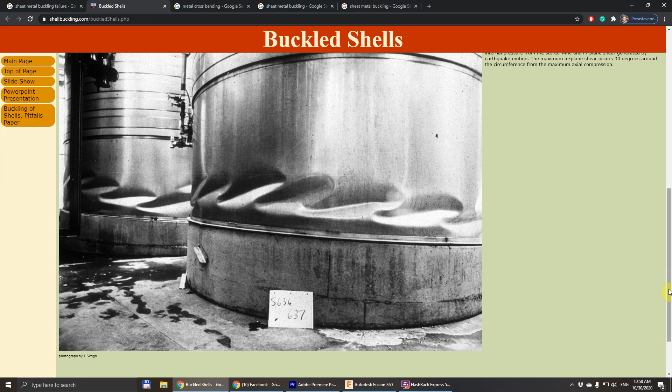Sheet metal buckling is quite a common problem, and to avoid this, manufacturers form various stiffening ribs and profiles into the surface of the metal. From all the shapes that I found on the internet, this one is the best. It would allow us to align the stem support during the spot welding to the anode plate without making any special jigs for it.

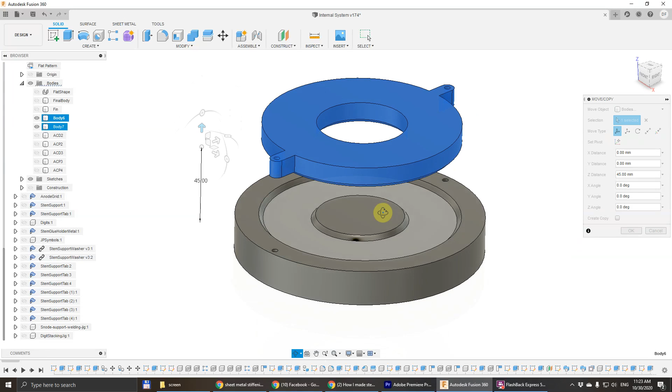To get some basic idea of how the press forming of this shape can work, I designed this press forming die to be printed on a 3D printer. It's just two parts and the metal will go between them, and I will press it on a hand press that I have available in my shop.

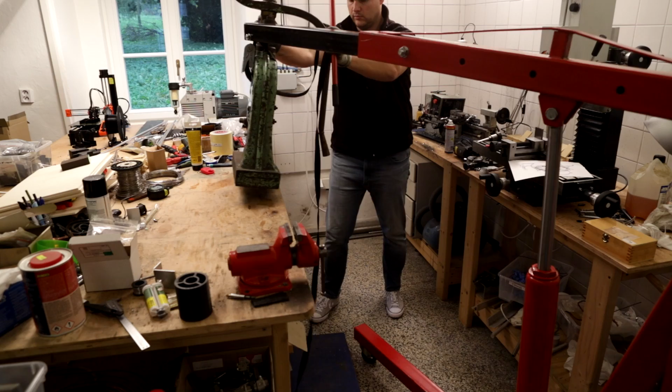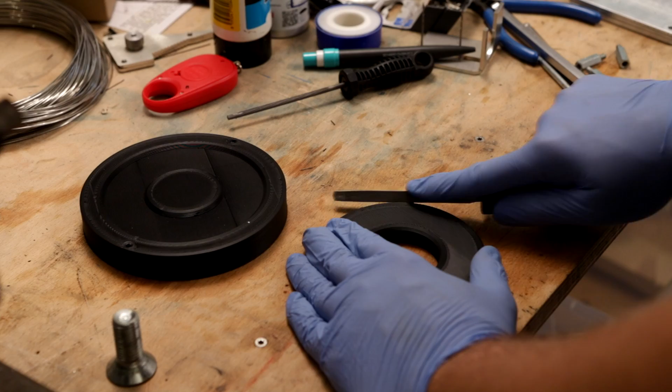As you can see here, it will be a lot of work to get this 0S system into 5S, but anyway, for printing the parts they need to be extra strong, so I'm using Prusament PLA with 10 perimeters instead of 5, which is the normal setting, and 50 to 70% infill. This turns out quite well, it holds the pressures.

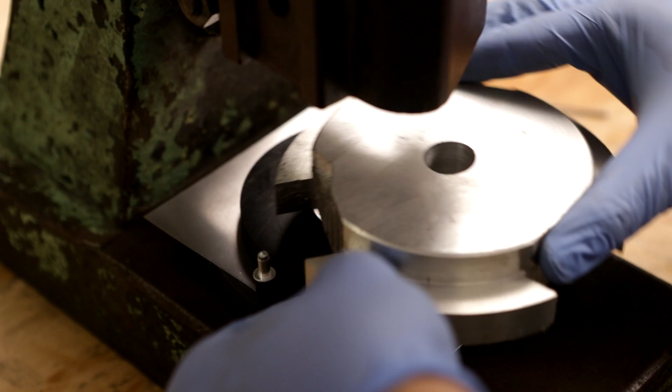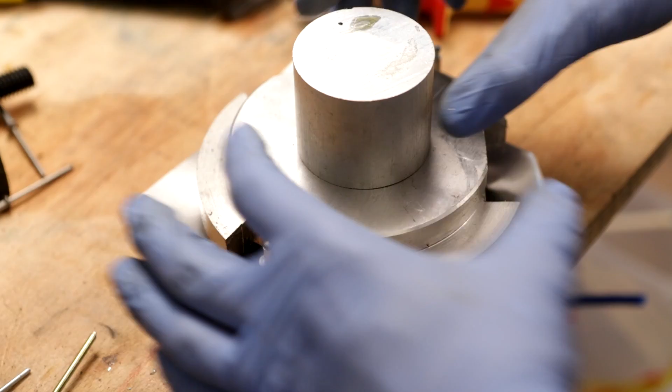The steel I'm using for the anode cap is called DC01. It's a deep drawing steel which is designed for drawing operations and very good for this type of forming. It has quite low tensile strength of 300 megapascals, and it should be the best we can use for this type of forming.

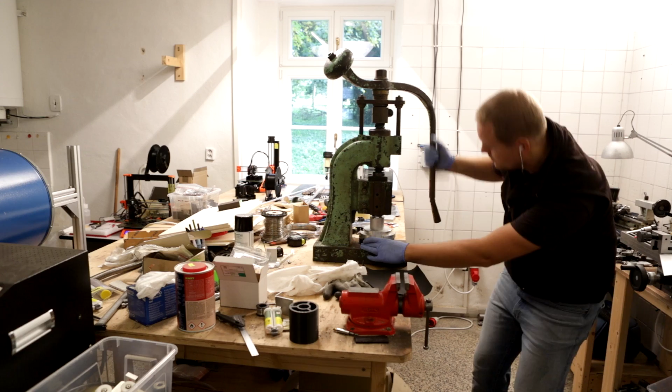And this is the first result. The center part is perfect, but around it there are quite a lot of wrinkles, so we will need to find a way to get rid of them. But what is important, already this shape prevents the metal from buckling quite a lot. And this is how it would look on the already preformed part for the anode cap.

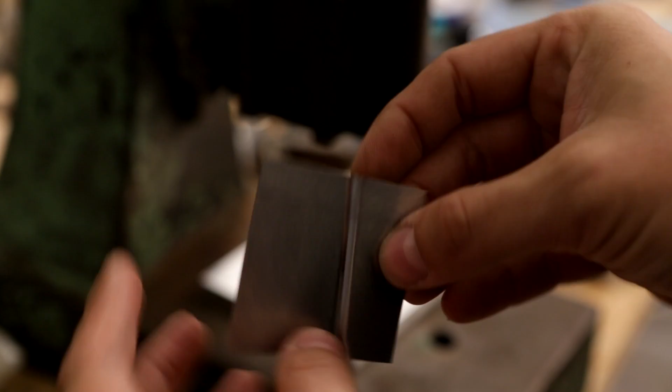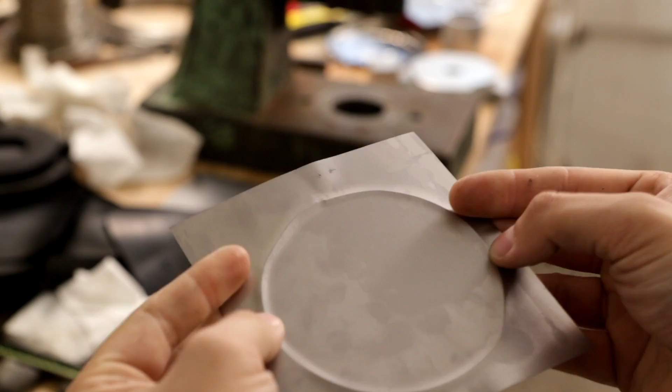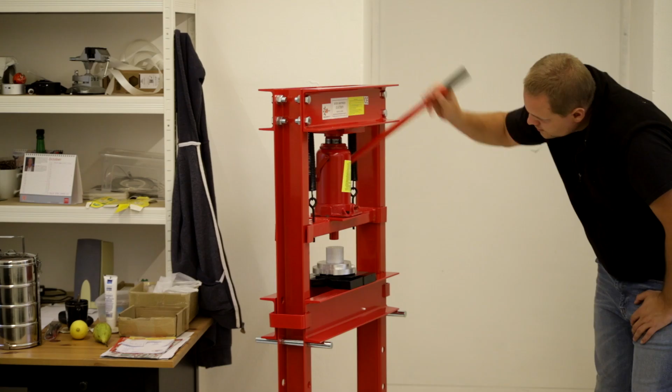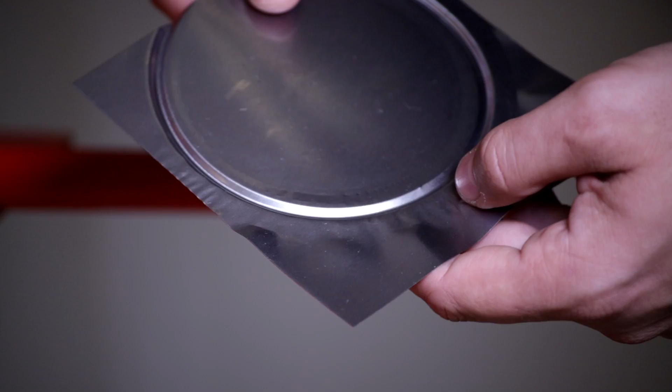I did some more tests with different shapes of the dies and different ways to form the sheet metal, and I quickly realized that I will need a more powerful press because this handheld one is not enough. So I bought a 20-ton hydraulic press. The press is really slow, but for prototyping it's good. Important is that it was cheap, it was like 150 euros, so for our purpose of testing it's enough.

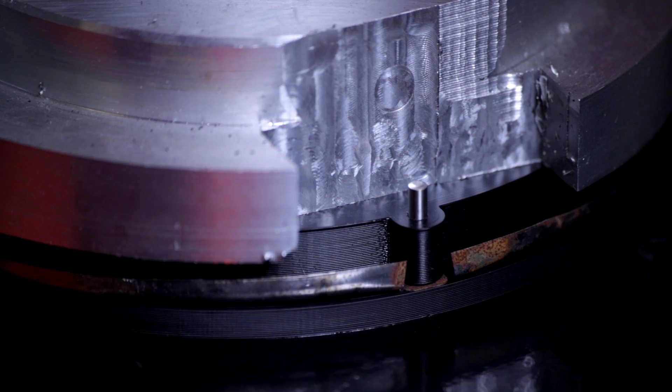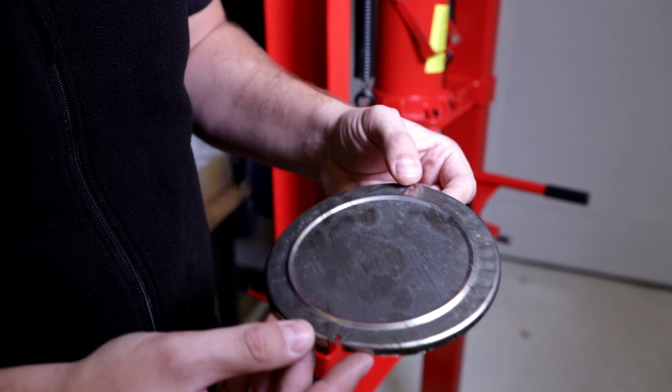With the hydraulic press I could test another forming method. It's called rubber pad forming, and it's about pressing the rubber pad against the die, and the pressure makes the rubber flow into cavities and around the edges.

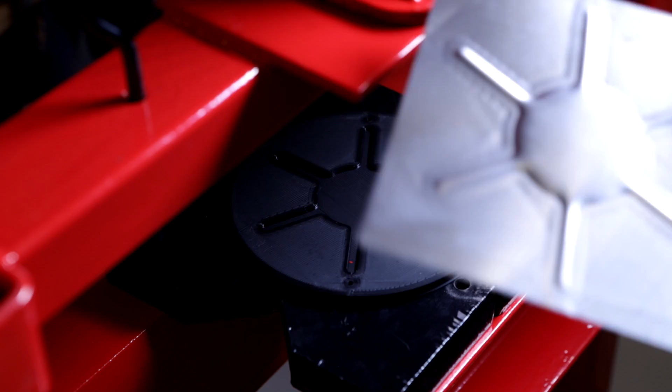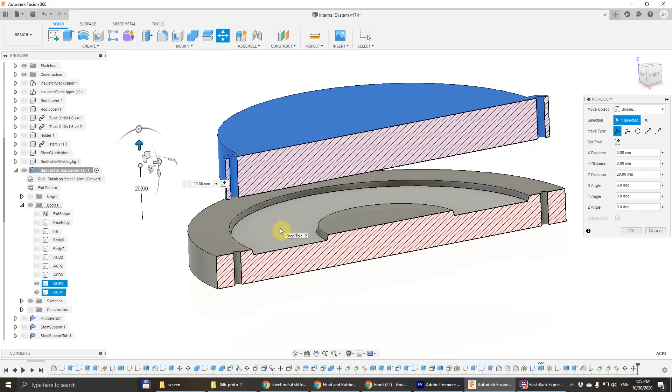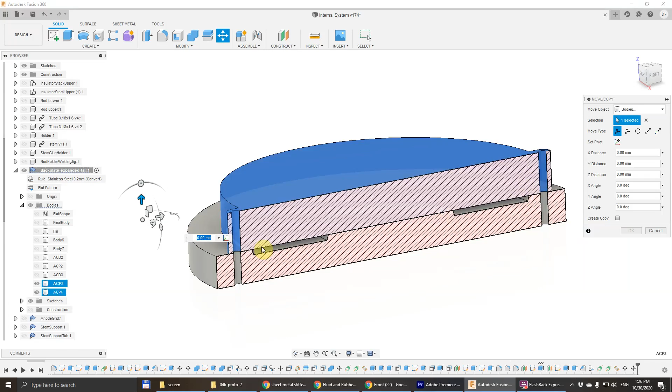In the end, I decided to return to the very first shape of the jar lid with the concentric circles, and instead of using two solid parts for the die, I will use the solid bottom. Then I will put a rubber sheet in between, and with a flat upper part I will press the rubber and it will flow into these grooves here, and it should take the metal with it and form the concentric rings into it.

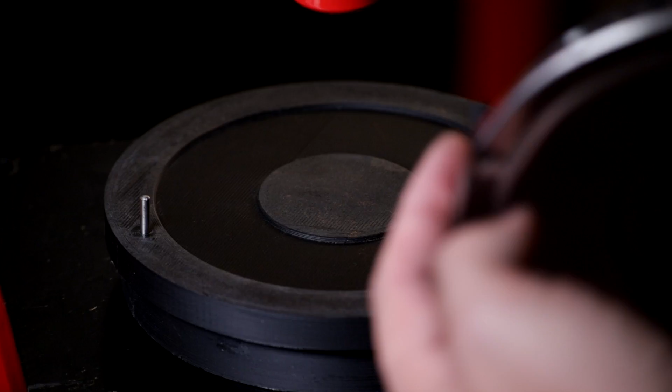The result produced with the rubber pad was nice and smooth, but still the anode plate tends to bend like this, and I found that the problem is here in these cutouts. It still tends to buckle in this direction. At the moment I will use what I have, but in the next iteration I'm going to redesign these cutouts so that we have a full solid edge bend here, which will help to improve the stiffness of the overall part.

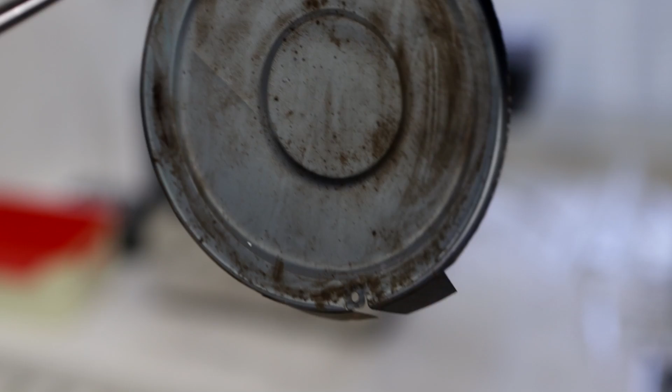To save time, I'm using the oven here instead of chemical blackening. The result is not very nice, but this is far from the final result that we will use in the production tubes.

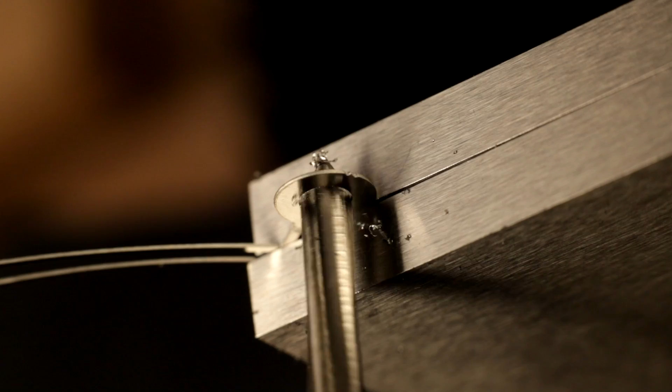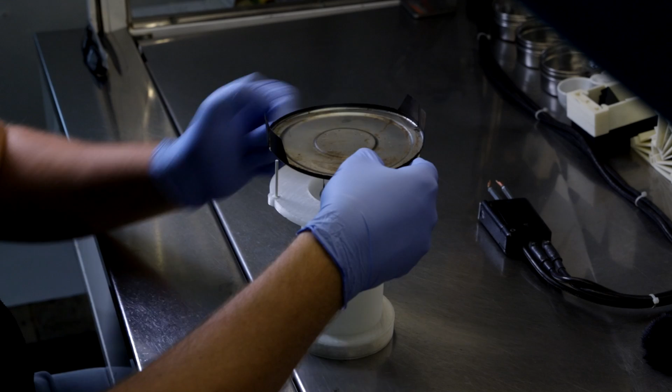In the comment section under the last video I got really great tips, and one of them was using a reamer tool to increase the diameter of the holes in the digits. I made a mistake and designed them too small, so I need to increase them before I order a new batch. And this is one of the reasons why I love YouTube so much. You get immediate response from 10 times smarter people than you are, and from people who have far more experience than you, and this really can get you farther in your project.

I'm using just a couple of digits here, not a full digit stack, but for the overall test of function of the tube it will be enough.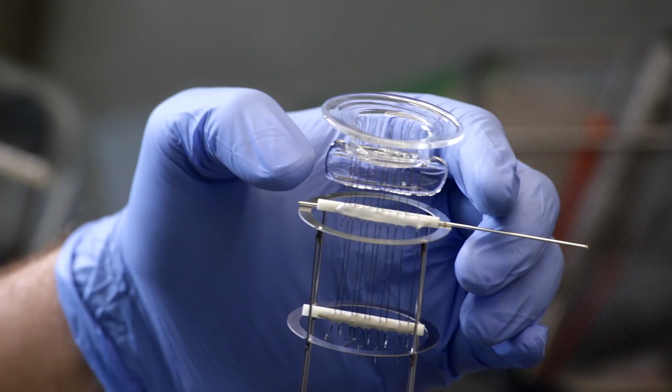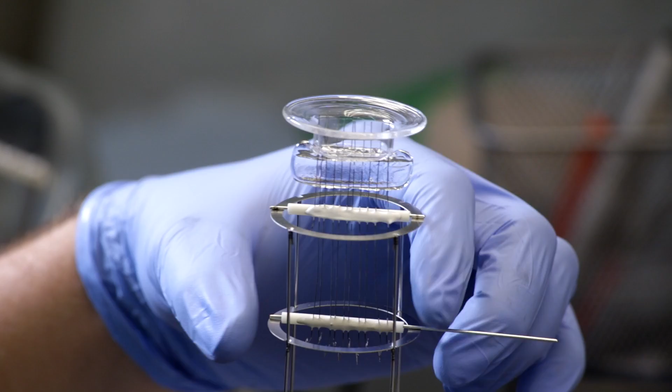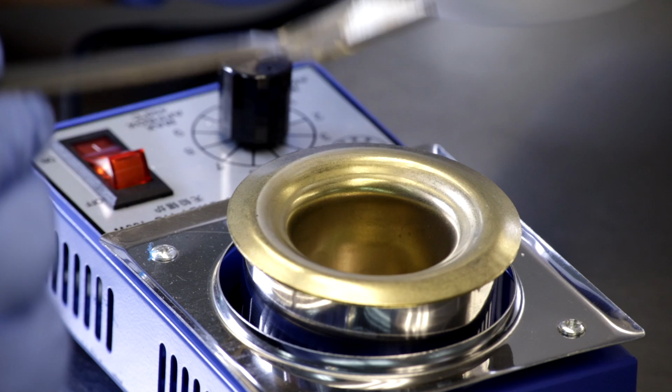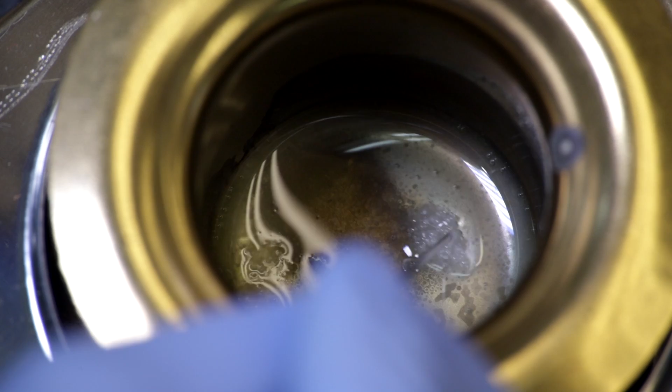Another improvement I'm testing here is the new way of stripping the ends of the thermal wire. The manufacturer recommends to use molten sodium hydroxide to strip the ends, submerge them into the water, and then you can clean them and spot weld easily. So let's see.

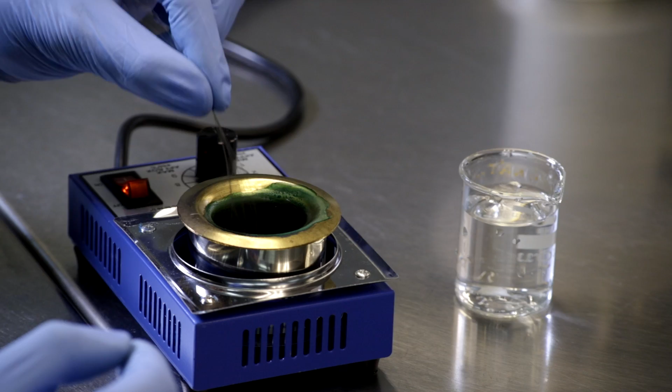The thermal wire is a nickel wire coated with a layer of ceramics. The reason why we are using it is that we want to use this layer of ceramics as an insulator against glow, because the wire will be directly connected to the digits. They will be glowing, and we want to prevent the wire from glowing, so it needs to have some layer of insulation.

I think this is a very good result, considering that this is the very first test of stripping the thermal wire this way. It will definitely need to improve the cleaning after the stripping, but as you can see, it's working very well.

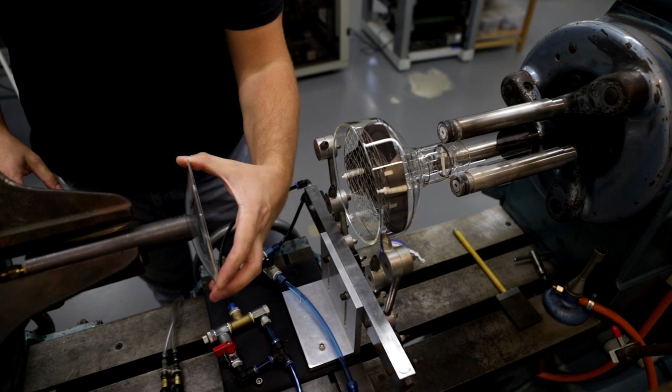And now it's time for the most stressful part, the glass work. For this beaker here we will need a higher flow of nitrogen. Last time the 0.7 liters per minute was not enough, so I'm mounting here a new rotameter for 10 liters per minute, so we will see.

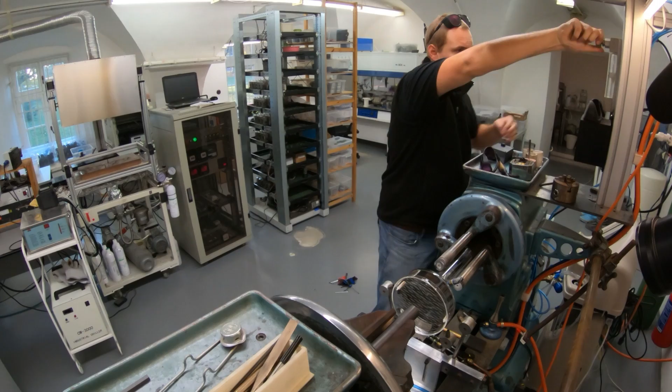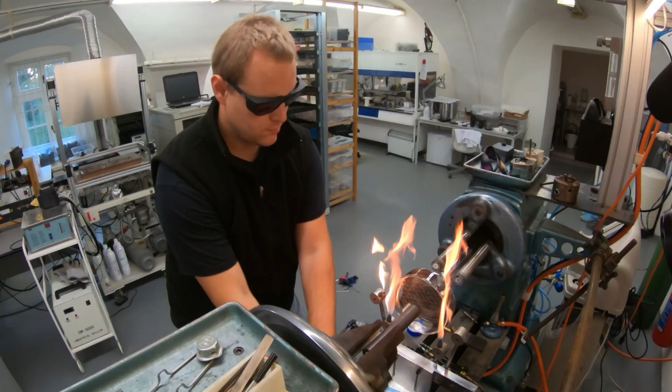This time I want to heat all the edge at once to softening temperature and then seal it with the graphite paddle. Last time I was heating it step by step and it wasn't good. It developed a lot of stress and also the seal was not uniform. So this time I hope the seal will be uniform and I will avoid development of the stress and the glass will not crack.

To be able to heat the overall seal I will need much more heat, so I had to mount another pair of jets to the carriage burner. You can see we have now 4 of them, so this should help us. I still have the handheld torch and this will be a backup solution.

This time the seal went out really well. It's a beautiful uniform seal all around the edge. It looks like it's from a professional factory. And I took extra care to cool it slowly, including the front window, because the window last time cracked because of the stress development.

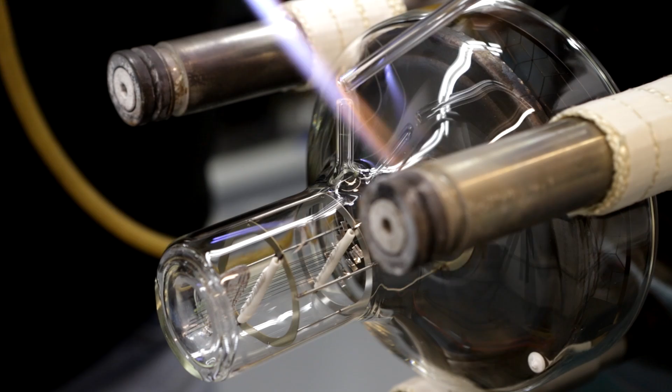And now finally the absolutely easiest part, welding the long exhaust pipe. This is so simple that I don't even need to change my big torch for a small one, which I normally use. I'm confident enough I can do it.

My impatience, the big torch and bad access to the pipe caused me to completely screw it up. The glass welded all together, closing the exhaust channel in the pipe, and so I had to fix it. I was trying to scrape the glass and crack off the tube. This is the way I normally do it, and then weld a new pipe. And then, rushing, I made another wrong decision.

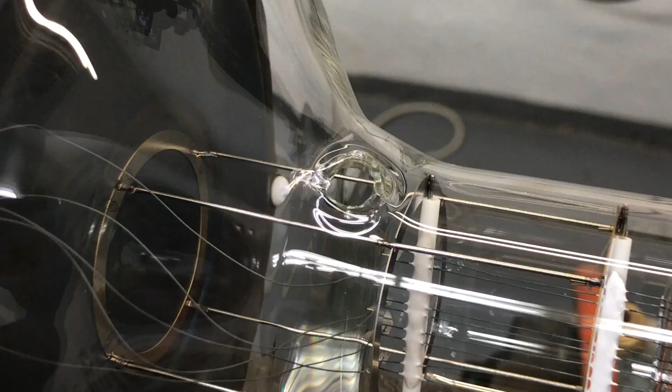When I need to open a finished Nixie tube for testing, for measurements, I always do it like this. I always scrape the top and then I hit the nipple with the tungsten rod and it always cracks off and I can use it. But in this case it didn't work. It took away all the tubing, which is not such a surprise, but I was so focused on the work that I didn't think correctly. Fortunately, I was able to fix it and bring it to the vacuum station.

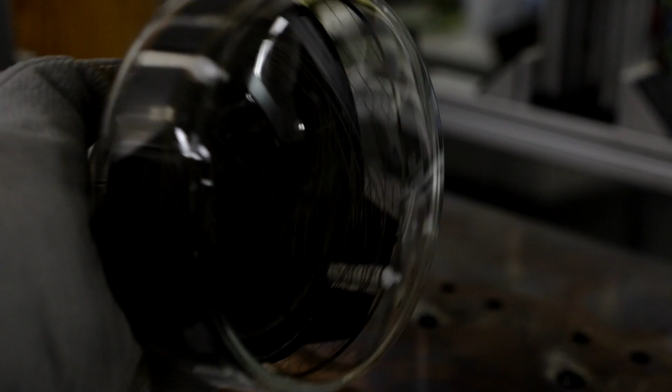So the first H-tube is finished and filled with gas. So let's connect it to the power supply. So the camera is running and the first glow of the H-tube. By the way, this is CD47, not that big. Oh, there is a short somewhere. Oops.

Okay. So the anode is shorted to the digit that I want to use. So maybe... Okay, it's probably the topmost digit which is shorted to the anode grid. So I will just switch to another digit. Oh, yes. Number 1. It's shorting in the base. Wow, that's huge.

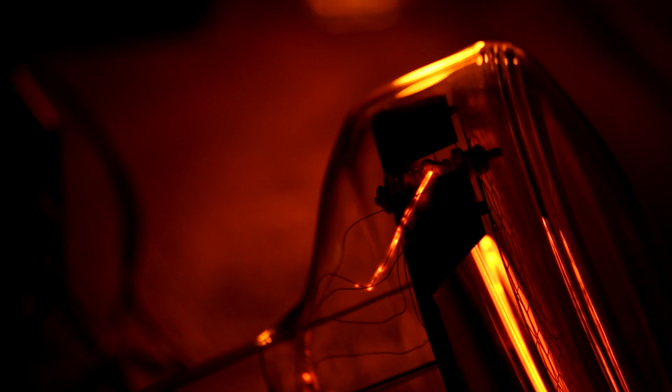I see the thermal wire is glowing. This is not good. This is not good. Oops. Number 6. This is not good at all. Oh.

Okay, despite the fact that the digits were quite seriously oxidized during the sealing operation, the glow is quite uniform and the digits don't bend, they keep shape, which is important because when they glow they heat up and expand because it's metal, and in this case they keep the shape. This is great. This is great.

So let's play with the other digits. The thermal wire is the first thing which is glowing. This is really disappointing. Maybe we will find a way to deal with it.